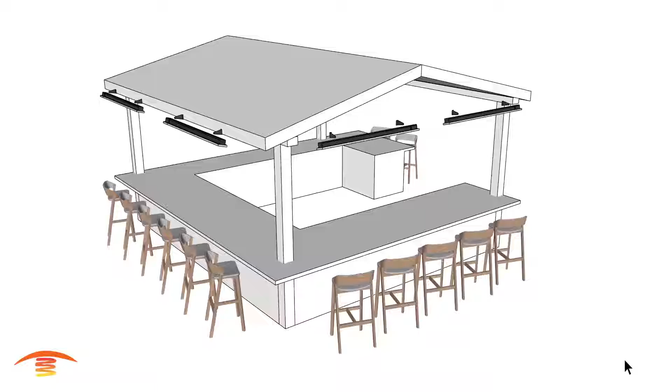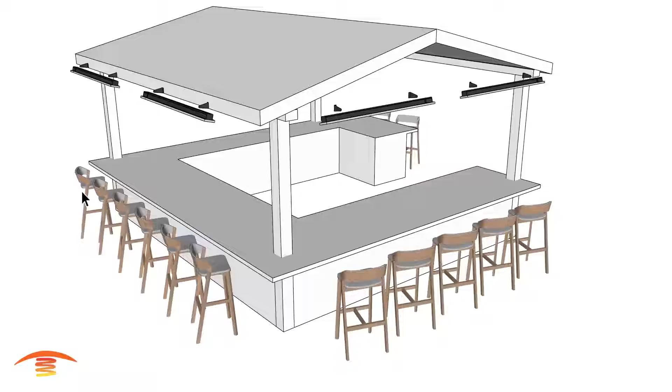Now let's get heating. All right, here's a little standalone pavilion residential application. You can see it's mainly got bar stool seating here, and then there's a couple of chairs back over here. I don't have all the details, so this is really a preliminary view. I don't have the details of the roof ceiling structure here. I don't know what's up in here. Maybe there's some beams or joists coming across. I'm not quite sure. But in any case, I'm just going to lay out what I think might work well for this application. Let's go ahead and look at the overall dimensions.

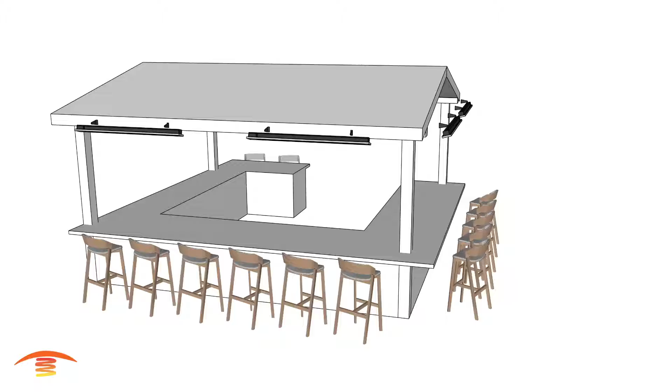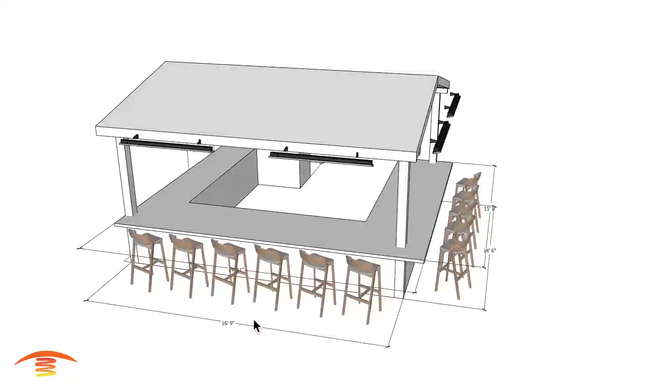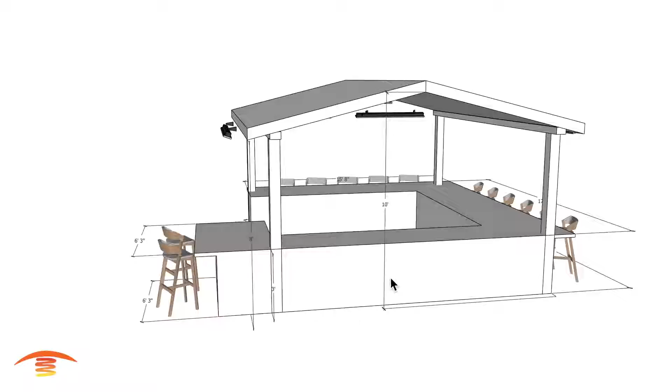Overall dimensions, I'm going to go with the outer dimension here, the countertop, but basically we'll call it 18 feet by 15 and a half. The base down here is at 14.6, down here is at 16.9. We also have this part here that comes out further, and I have that at about 6.3 and 36 inches tall. This lower section of the eave I have at 8 foot, and the apex of the rooftop or ceiling at 10 foot, and I think that's about it.

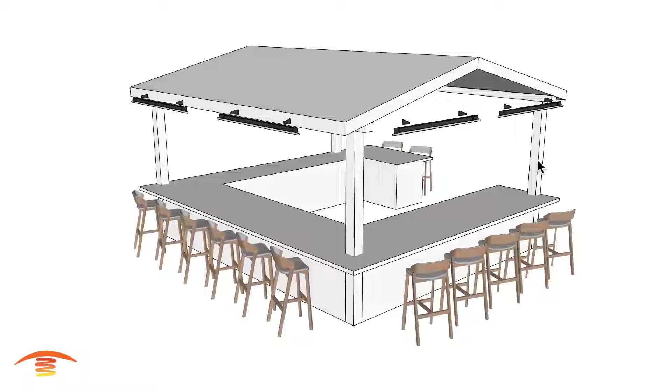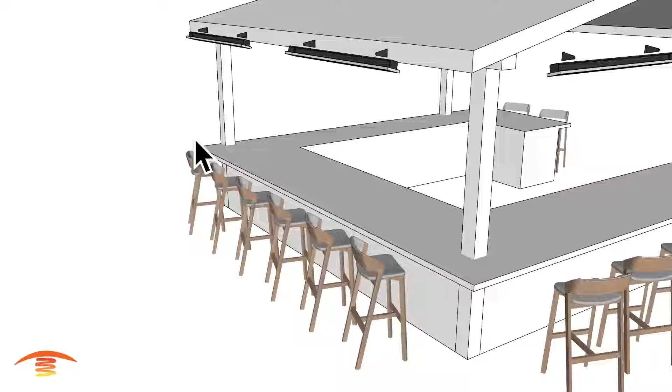All right, so obviously you can see we have some Infratech electric heaters. This is in, I believe, the desert environment, and it gets very cold in the winter and very warm in the summer. This customer also stated that there was a lot of wind in the area, so electric heaters would work out very well in that atmosphere. So basically I have here the SlimLine units. These are 4,000 watt units. I'm hesitant on placing anything warmer than a 4,000 watt heater at this height above a bar stool area, just because I don't want to overheat them. I think this should be just fine, but some people might be a little bit cooler in, let's say, anything below 50 degrees. So you may consider putting a hotter heater here, but I think the 4,000 should suffice for the majority of the colder season.

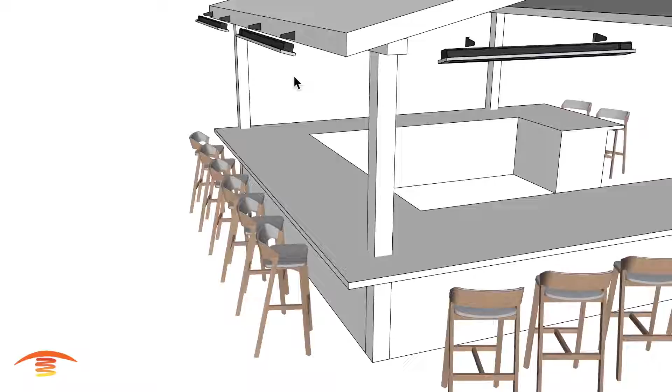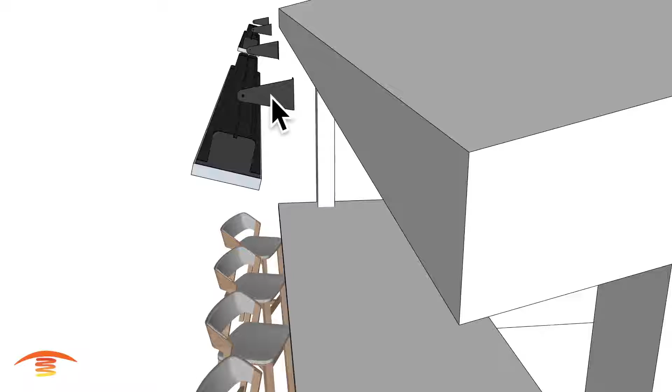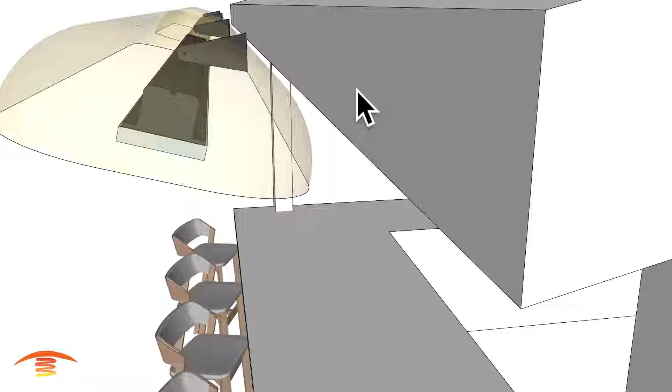You'll notice here that I do not have these brackets attached to the eave, and that's because this is the OEM standard bracket. You'll need to get a 4-inch longer bracket in order to meet the clearances. The clearances above the heaters are 6 inches from this edge here to this outer edge over here, and you can see with the standard bracket it would be touching or penetrating the eave. They come in the standard bracket, and then in 2, 4, and 6 inch longer lengths. So I'm choosing the 4 because I really need 3.5. So the 4 is what I'm going to utilize.

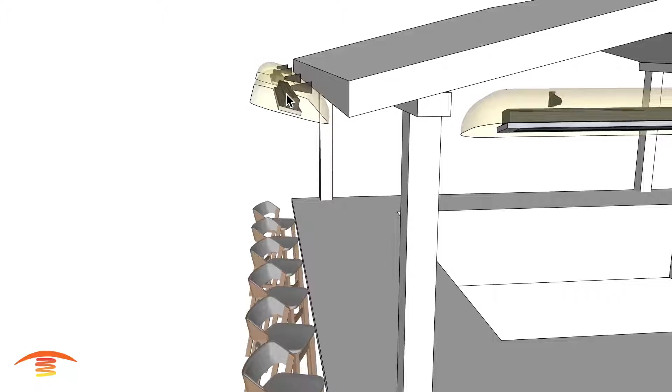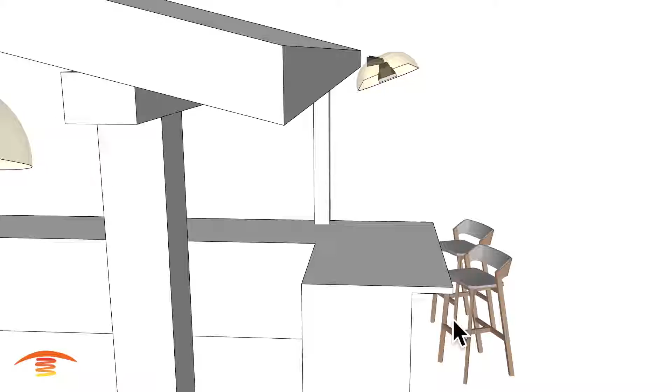Now these particular heaters on the eave here I have at a 20 degree angle. I also have these in midair. I don't know if there's anything to attach to on this portion of the patio, but I have these also at the same angle. And over here I have them at a 30 degree angle, because I need to reach a little bit further out to the location out here, and you can see that the eaves stop a little bit short compared to this side over here.

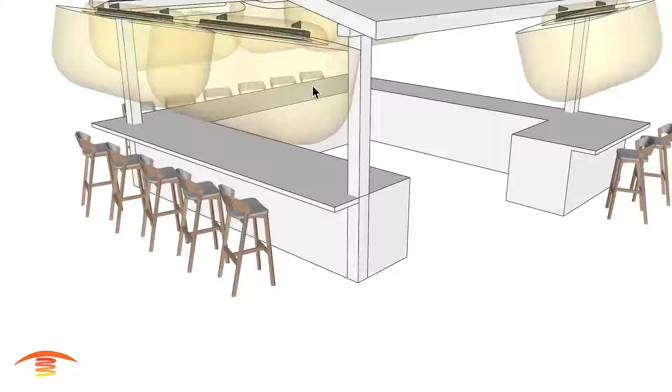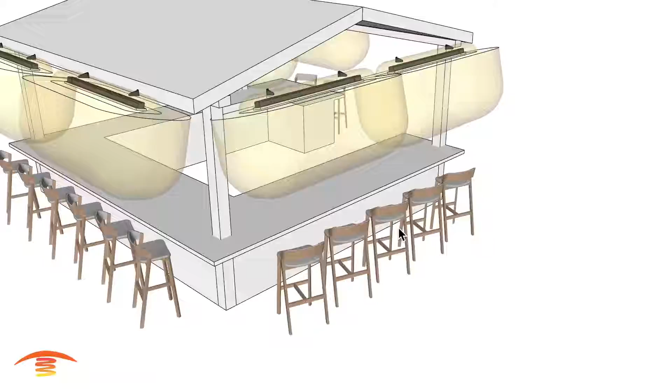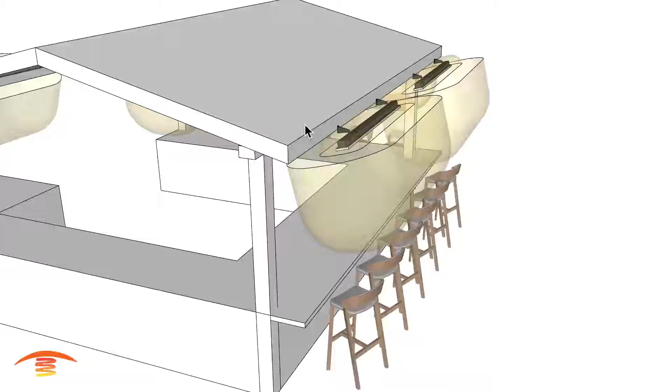All right, the other thing to be concerned about is that we're meeting the clearances to combustibles around the bottom of the heater, and it looks okay. We have a little bit of a question mark over here. Again, I'm not sure whether we'll be able to place a heater over here at all anyways. The manufacturer does recommend a clearance of 3 feet between the heaters. I'm not sure that's going to be possible with the distance we have and the amount of space we need to heat. I believe this section here I have at 24 inches off the ends, so 24 inches from here to here is the starting point where the heater is mounted. Same over here. And over here I have 36 inches from here to here, and same with this side, as well as this side over here.

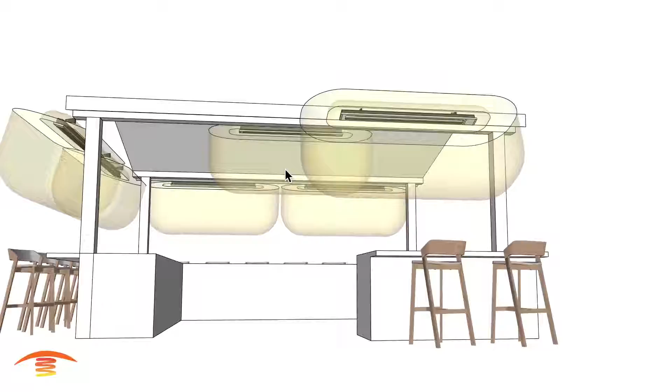All right, there's also going to be a cooktop; this is basically an outdoor kitchen in here. I do have one placed in the center of the patio, so it's centered this way, and also centered this direction. If there's a beam here, you can go down with a little bit of a further drop. But this is actually at that 10-foot height that I have right here.

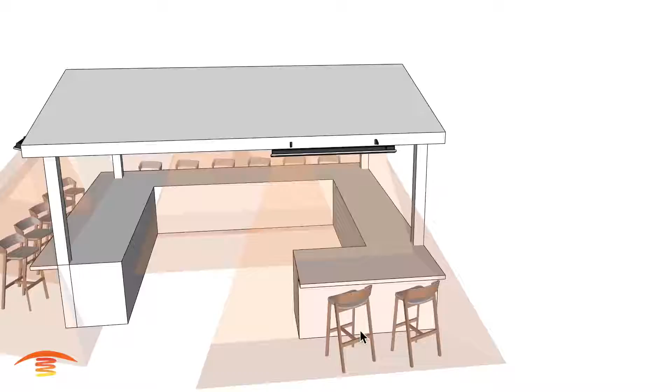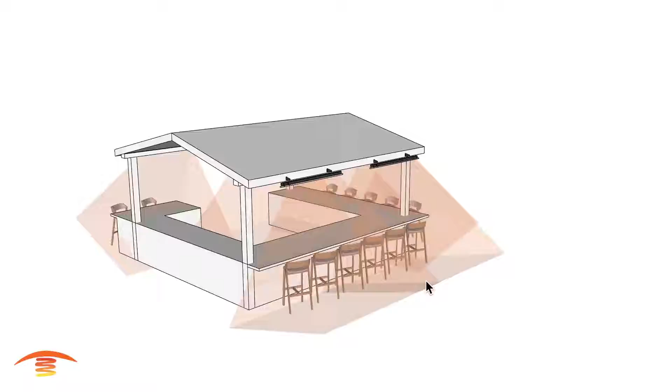Let's go ahead and look at the array footprint. You can see with the setup I have here, we're getting fairly good coverage over here. Over here, I think this is excellent coverage. If you're the coldest person in the room, this would be a good spot for you. We got good consistent heating over here, as well as this portion over here. And of course in the center, we're not hitting the whole entire area. We are hitting a good majority of it, so if you're occupying any of the space on this side, it should be just fine, as long as you're standing inside here.

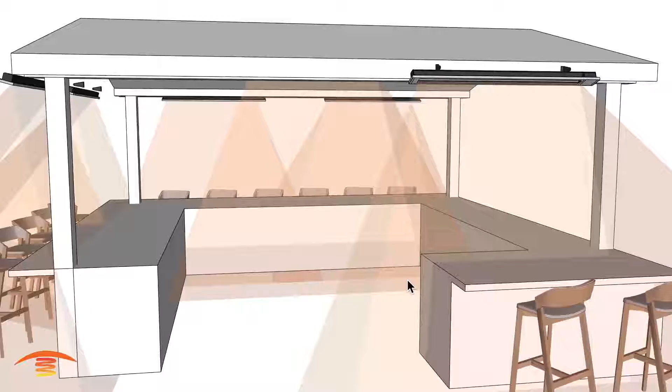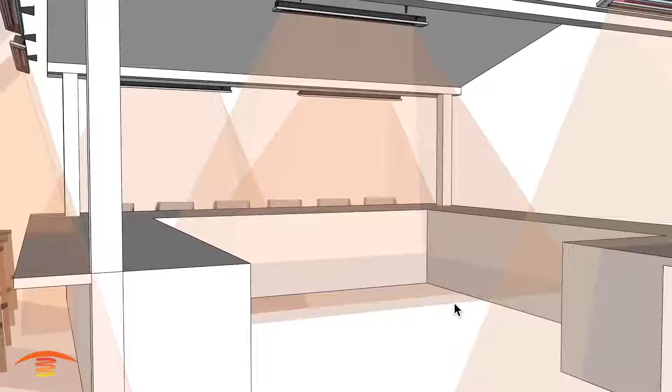This is not an application for casual sitting, let's say on just a typical chair. I'm setting this up for bar stool seating height. Bar stool seating height is higher, and that's why I'm using this particular model here. Same goes inside here. I'm counting on the fact that this is just for standing room, and if you had seating for some reason, then this may or may not be suitable for you at all. So, all right, well, I hope this has helped.